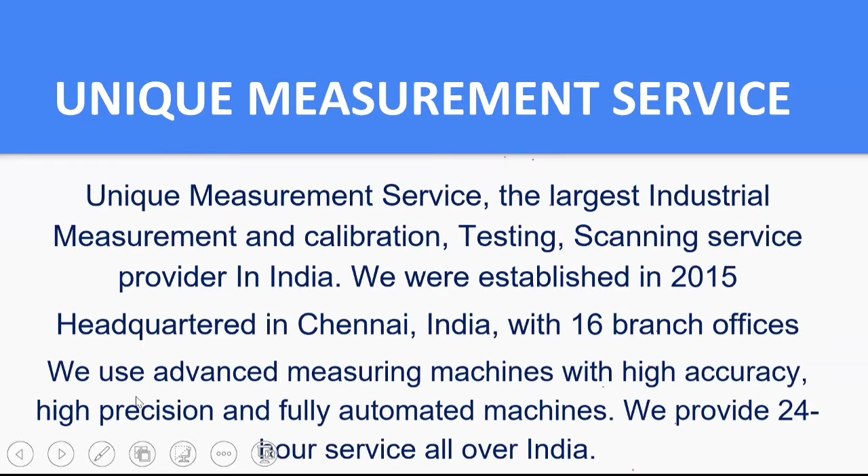Our major services are CMM inspection, portable CMM for on-site inspections, laser tracker inspection, calibration, and reverse engineering. We also provide metrology training courses.

Vision 2030: our vision and motto is to train 10,000 plus engineers and freshers with placement. As of now, we have been training nearly 25 to 40 freshers monthly across 2 batches. We have an exclusive training center at Bangalore, Peenya location. Our motto is to train the freshers, and we also provide paid advanced-level courses for quality control engineers.

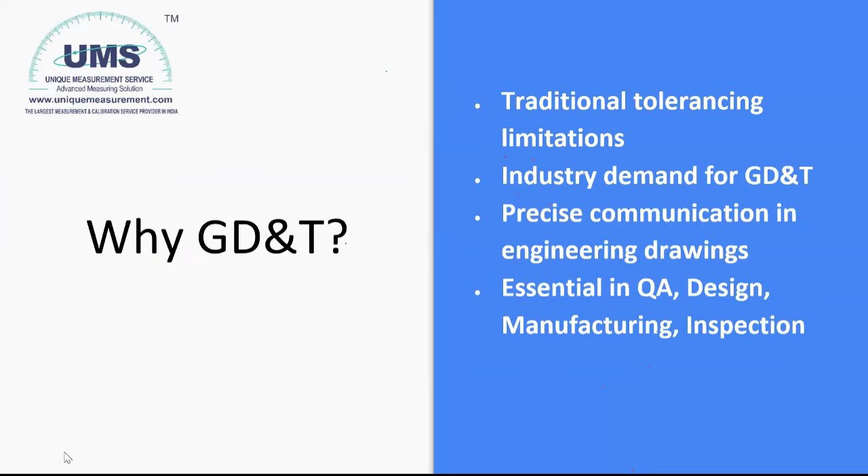This session will give you a strong foundation in GD&T: why it matters, how it is used in industry, and how it can help you stand out in your career. So get ready to decode the language of engineering drawings. Let's begin our session. I assure you it's going to be insightful, interactive, and definitely worth your time. Today you will be learning the basics of GD&T, the basic concepts, and how real world cases can be correlated with GD&T.

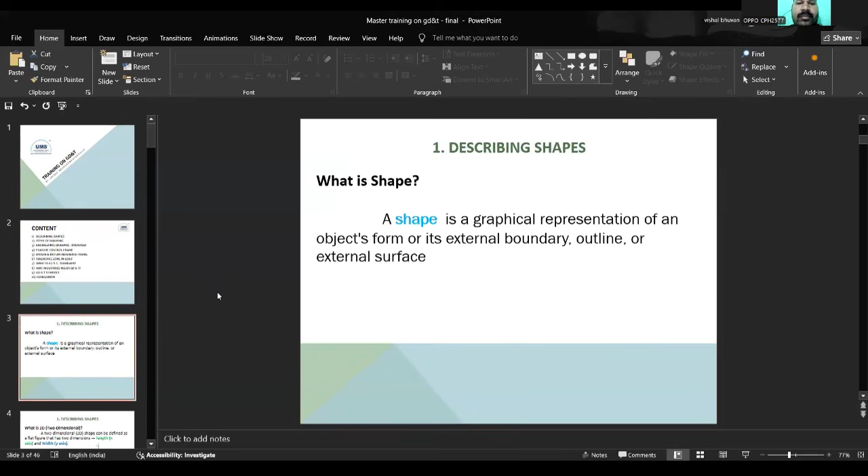So the first one is describing shapes. What is shape? It's very important because without understanding shapes, we cannot identify an object. A shape is a graphical representation of an object's form or its external boundary, outline, or external surface. So everything we see in the world around us has a shape.

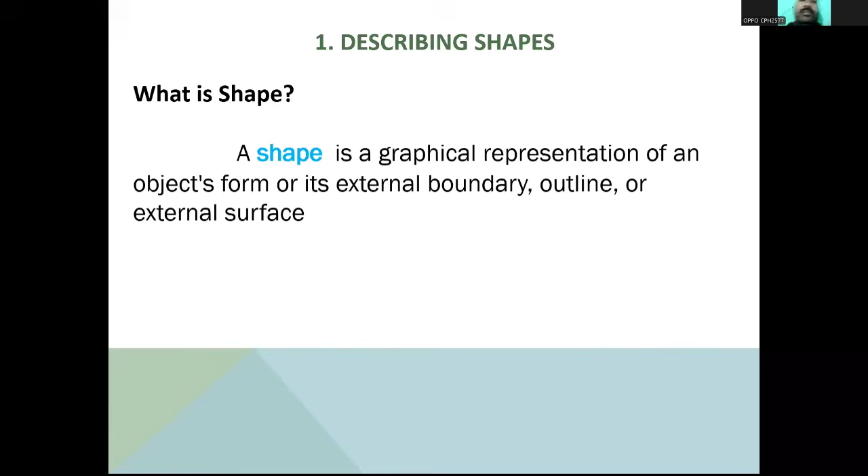We can find different basic shapes, such as two-dimensional and three-dimensional shapes. Now we will discuss two-dimensional and three-dimensional shapes. What is a two-dimensional shape? It has two measurable dimensions, which are length and width. We can call length as x and width as y.

Here is a 2D coordinate system. I will show how it works with a figure. This 2D coordinate system works with two coordinates for each point, like x and y, using these two coordinates to define any point or object. If I draw on a 2D coordinate system, here it is x and this is x minus, and this is y and this is y minus. So you can find the x-axis and y-axis functioning here. It doesn't have any depth or height.

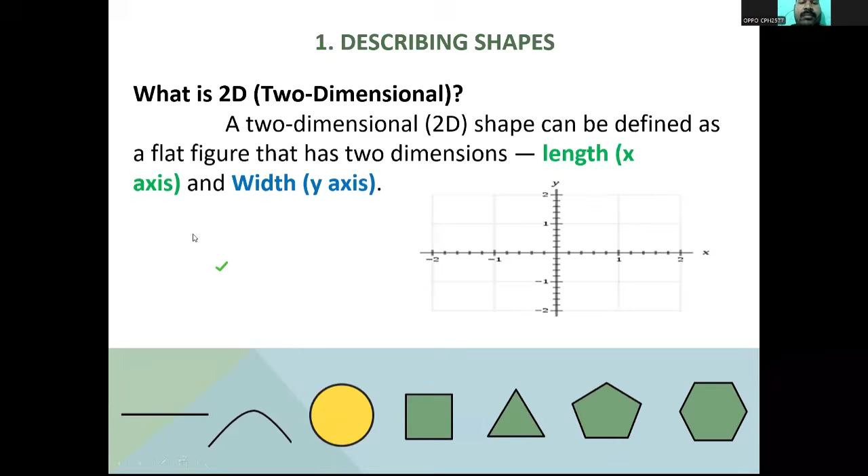So if someone will ask what is the difference between 2D and 3D, you can tell 2D is a two-axis measurable dimension and 3D is a three-axis, which means X, Y, Z. Three-axis will perform.

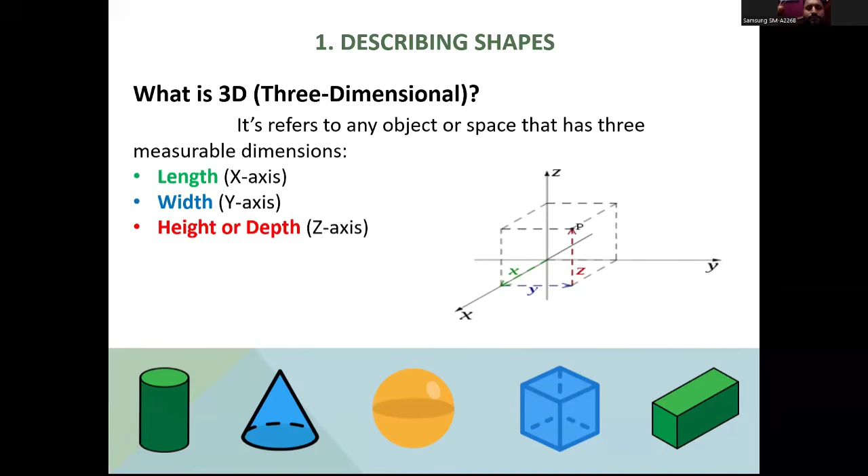So next one is type of drawing. There are two types of drawing: one is artistic drawing and the other is technical or engineering drawing.

Coming to artistic drawing, it is the art of creating an image by making marks on a surface. Using a pen, pencil, and ink, you can draw visuals of everything you have seen. You cannot get any technical information from this drawing, like dimensions or material properties. It is one type of thought expression. This drawing's purpose is to express creativity and convey emotions or represent scenes or objects visually.

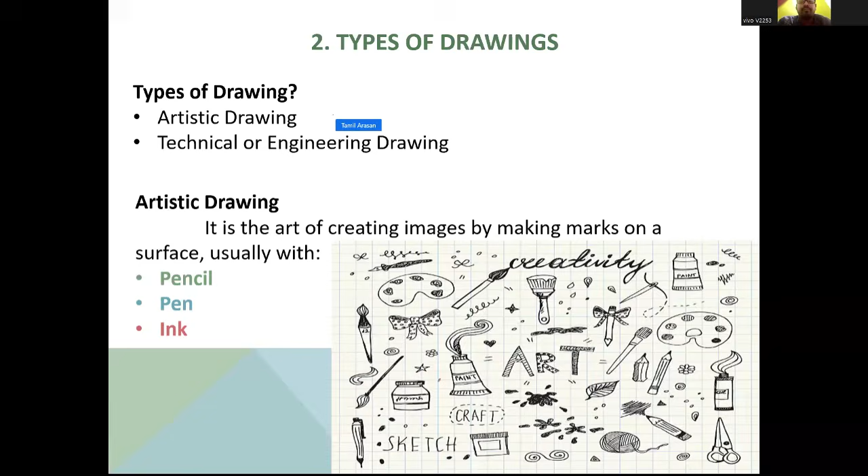So next one is technical drawing. Or engineering drawing will represent an object, used to communicate design intent clearly and precisely. It follows some standards, rules, and symbols to convey the size, shape, material, tolerance, and manufacturing intent for engineering components.

This type of drawing helps to produce a component because it provides all technical data like dimension, material requirements, and units. So this drawing's purpose is to communicate how a part should be manufactured or assembled.

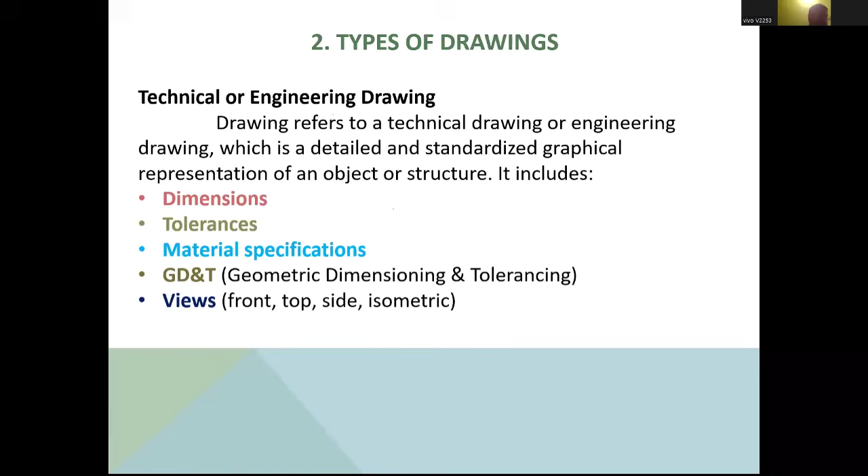So here I attached one sample engineering drawing for you. In an engineering drawing, it consists of more details like frame, title block, revision block, bill of material, lines and views, some cut section views, and tolerance tables, etc.

So let's start from the frame. You can see here, right? In the edge we have some scale, that is called frame. Generally, the frame provides a visual boundary and makes it easy to identify the dimensions and content. By using this frame, we can find specified dimensions or features on the drawing.

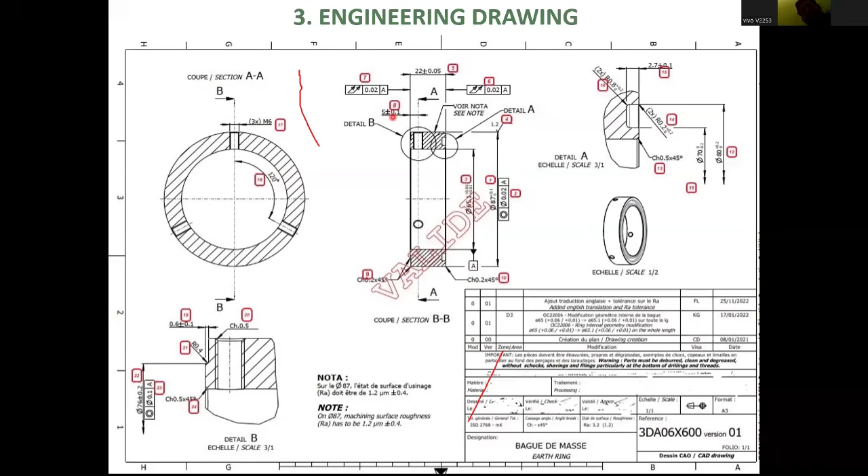I will give one small example. I inspect one customer part using a measuring equipment. I can check all dimensions except one, which is 5 mm length. Due to it being unreachable, we can't measure this. So we just imagine like this. I would like to communicate this matter to my customer. So I call my customer and tell him that the 5 mm distance was not possible to inspect.

Then he opened the drawing and noticed some of the dimensions are the same, like 5 mm. So you will consider this dimension and this one is 5 mm. You just imagine this. At that time he got confused. Then he asked, where is the exact location of the particular dimension?

So at the time I explained this 5 mm is fitted on E4, which means you can see here, this 5 will intersect with E location and 4. You can see if it is in here, if it is in this 70s, then I can call this one seated in A and 3. For that we are using this frame, and then its title block.

Usually a title block is located at the bottom right corner, so here you can find it. It has essential information about the drawing. It helps to identify company name, part name, material, what type of material they used, and the units, and who drew this drawing, and who approved this, and what type of projection is there, and scale details, which scale they are using for this drawing. So some essential information you will get from this title block.

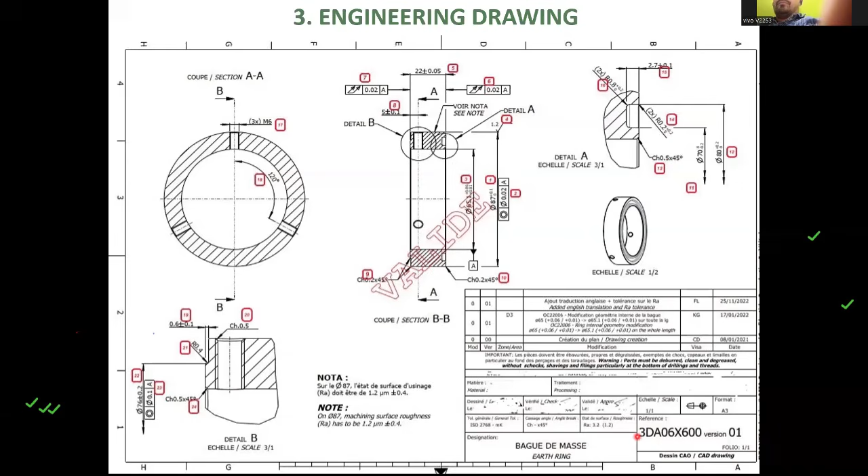Next one is a revision block. The revision block helps to track changes made to a drawing, ensuring a clear history of modification and approval. I will show how it comes. In some drawings you can identify this one is the revision block. So first one is revision; some industries will mention 1, 2, 3 like that.

But some industries use A, B, C like that, they will mention. So here is revision A, and here some description is given. They updated chamfer details on the 9th of February 2022. So who made this update? They just mention it here in short form, and they also mention which zone they updated.

So the second one is a diameter change. The 12 mm diameter was changed to 10 mm diameter on the 9th of March 2022, and here they also mention some zones. So for that purpose, we can identify a revision block in drawings.

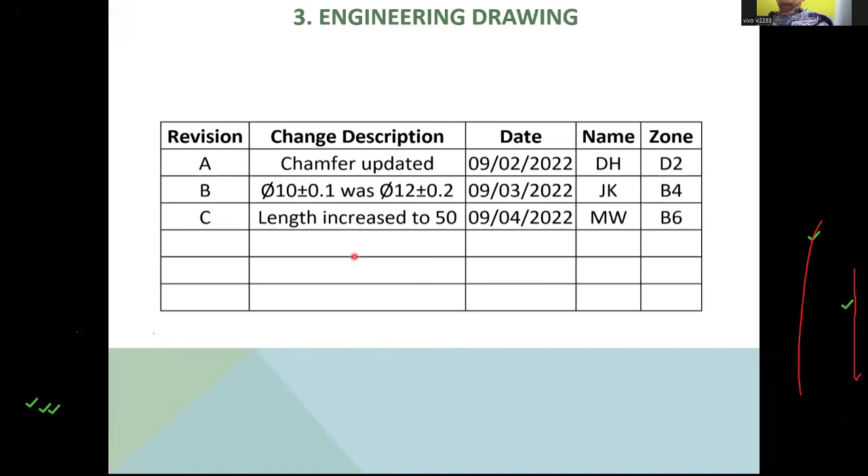So next one is bill of material. Frequently we can see this type of table in assembly drawings. While assembling gauges or fixtures, it will be helpful to organize child components and where they are assembled.

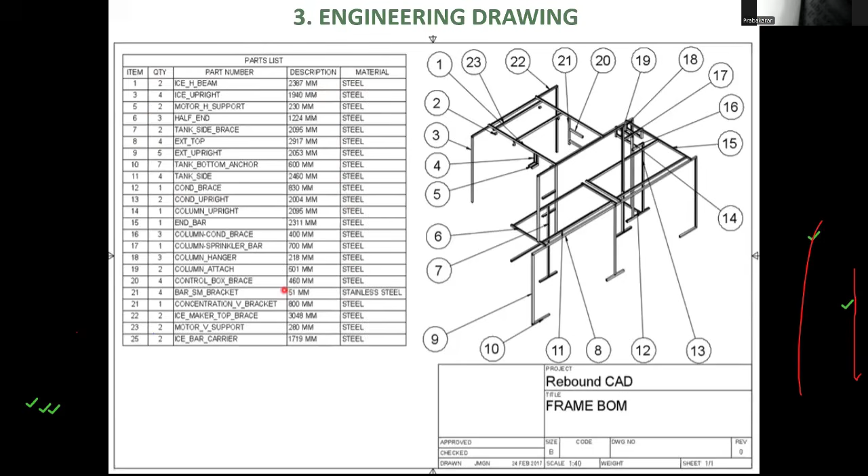So here you can see one table I attached, and in this table you can identify the child part details like the part number, how many quantities are required for assembly, the overall size of that particular component, and which material. So every detail will come. So it will be very helpful to organize child components, and we can assemble easily.

So next one is lines. We are using so many different lines here. So the first one is construction line. This line we use for multiple views of the same item. At that time we are not getting any final drawings; in pre-final drawings we can see all this. So we can use construction lines to prepare multiple views.

And second one is center line. Center line is used to indicate a feature's center axis. And then hidden line. It gives internal feature information of parts. If any internal feature is there, they will draw hidden lines like this. And next one is phantom lines. These phantom lines are commonly used to show movement of a component. It shows original position to alternate position. If any movable area comes, then they will mention these phantom lines.

And then next one is drawing lines. It represents the visible edge and outline of an object as seen from a particular viewpoint. And next one is break line. Break line is used when some feature cannot be drawn fully. It is for long and straight features. So we can use it in very lengthy drawings.

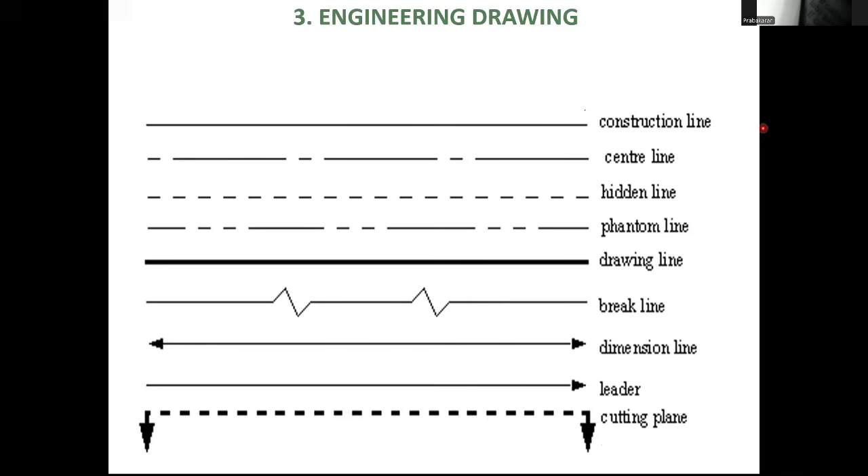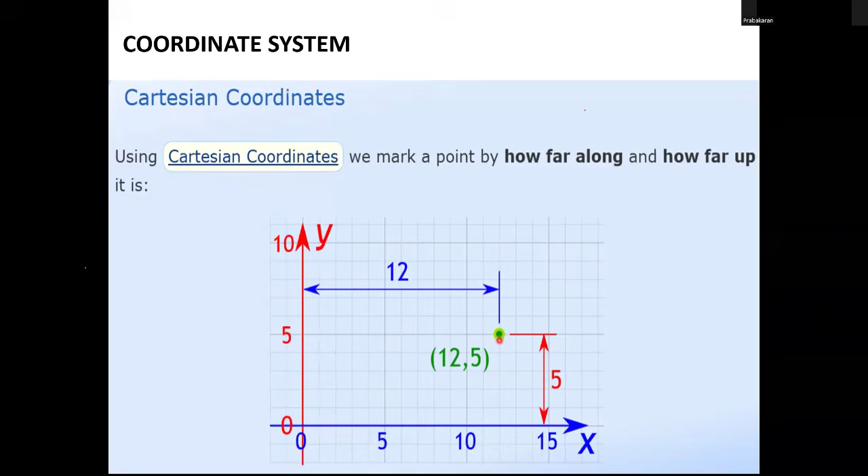So next one is coordinate system. There are two types of coordinate system. First one is Cartesian coordinate system, and next one is polar coordinate system. So coming to Cartesian coordinate system. Cartesian coordinates use linear distance. Here we only consider horizontal and vertical distance. I have a point here, so I need to find its distance from my origin. If we consider this as origin, in x-axis it is 12 mm distance, and in y-axis it is 5 mm. So only linear distance we use in this Cartesian system.

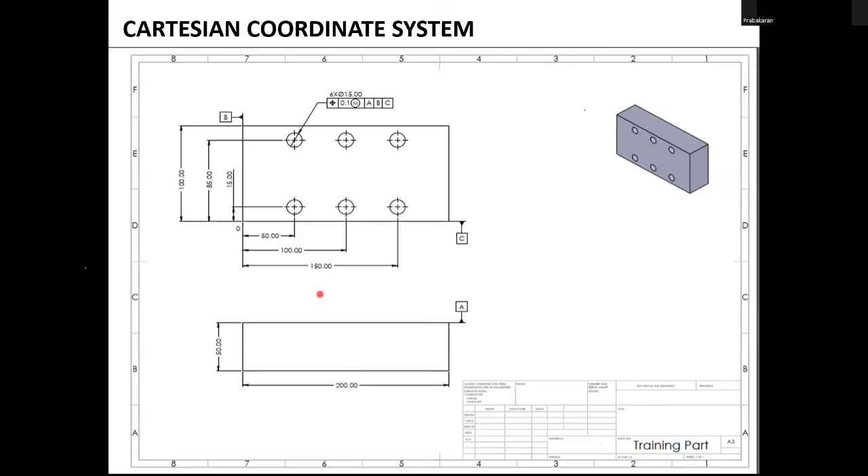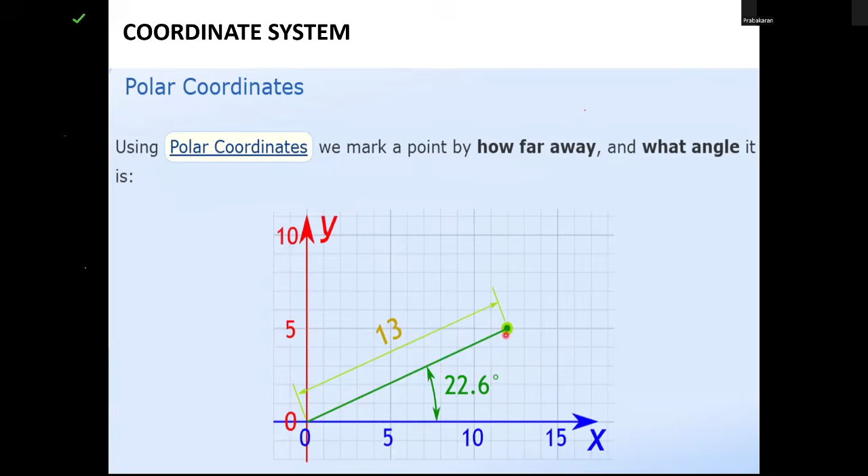So coming to polar coordinates. I already know about that point. We have it in Cartesian distance, but without Cartesian distance, we have to find this point. So by using angle and radial distance, we can identify these points without the Cartesian coordinate system. So I will show a drawing of how it works. So here it is.

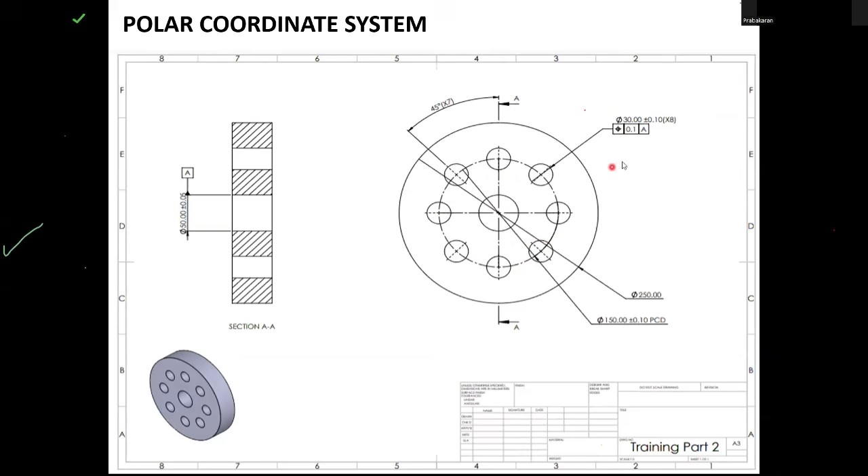So next one is feature control frame. A feature control frame is a rectangular box used in GD&T to define tolerance and how they apply to a feature of a part. This feature control frame is divided into compartments or blocks from left to right. So the first compartment will be a geometrical tolerance symbol. So we are mentioning the geometrical tolerance symbol.

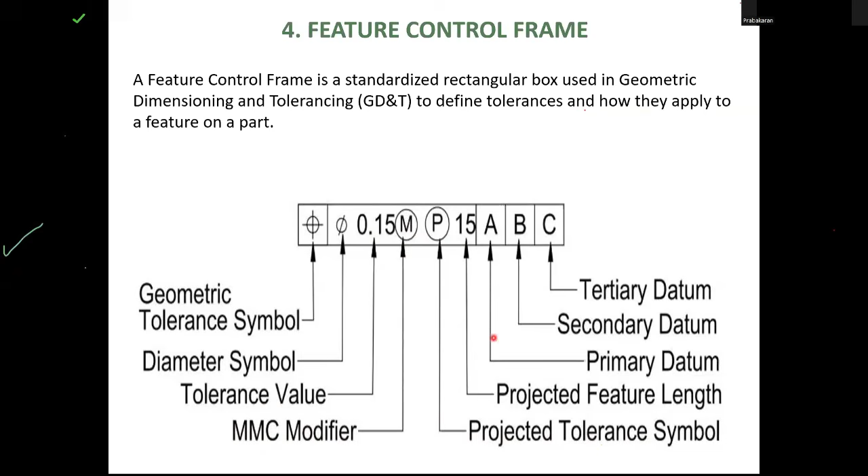Projected tolerance is a modifier used in GD&T to control the variation of a feature that will be assembled with another component, especially when the feature extends out from the part, like pins, studs, or threaded holes. It ensures the actual assembled position stays within the acceptable limits. The purpose of projected tolerance is to control the orientation and location, not just at the feature base. Through the height we can control this position.

And next, here they mentioned the primary datum, secondary datum and tertiary datum. The feature control frame's purpose is to communicate how much deviation is allowed and show which datums are used to inspect the features.

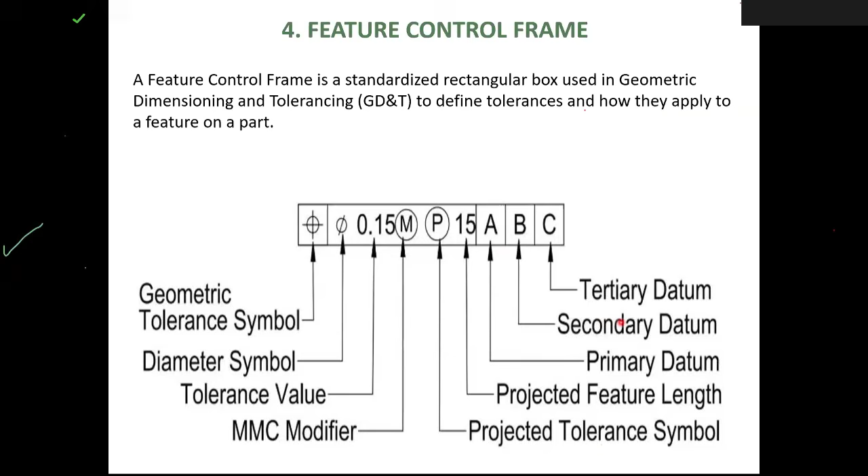Next, what is a datum reference frame? A datum reference frame provides a fixed location for the part or its features, allowing for accurate measurement and tolerance. It is a coordinate system composed of three or more datums, usually primary, secondary, and tertiary. It ensures parts fit together correctly in assembly.

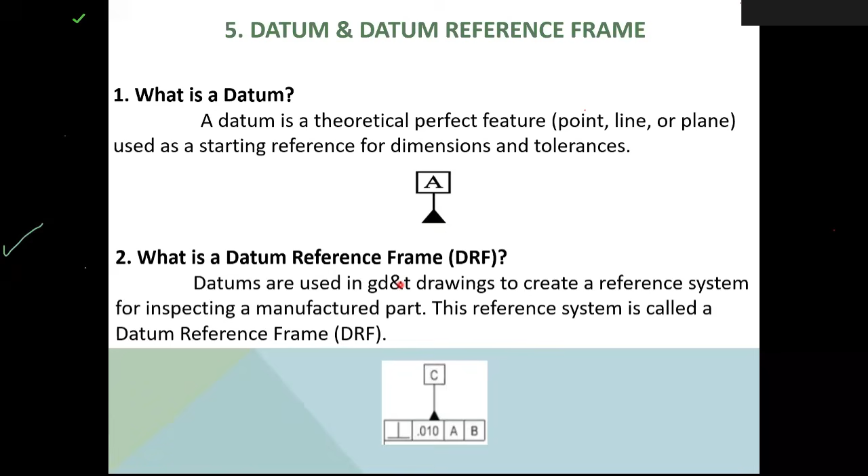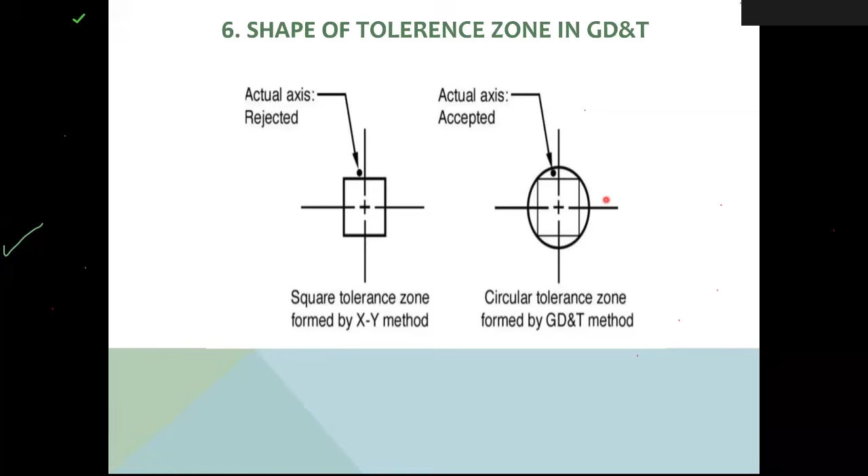In the same case, I applied this circular tolerance zone. Once I applied the circular tolerance zone, my part was okay, because it covers 57% more area. Compared to the square tolerance zone, the circular tolerance zone gets 57% on the higher side. So in the same case, when I used the circular tolerance zone, my part was okay.

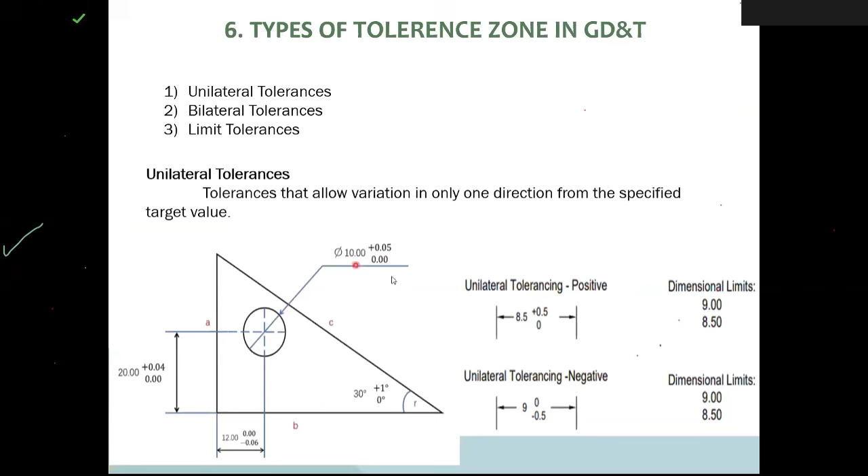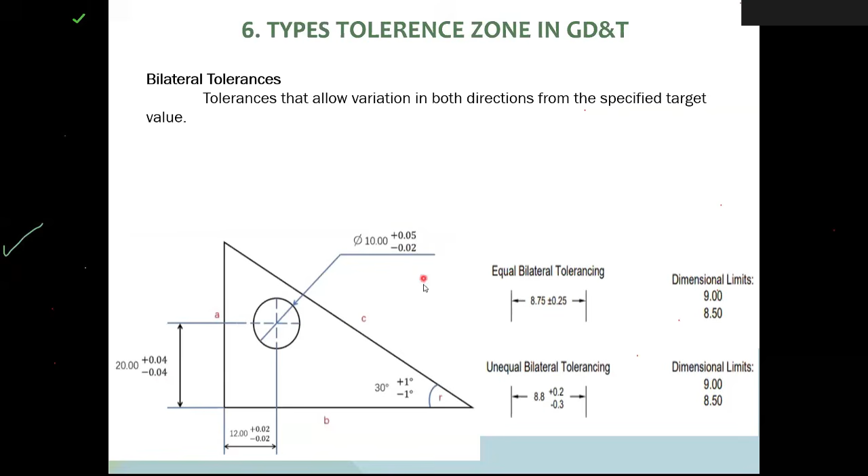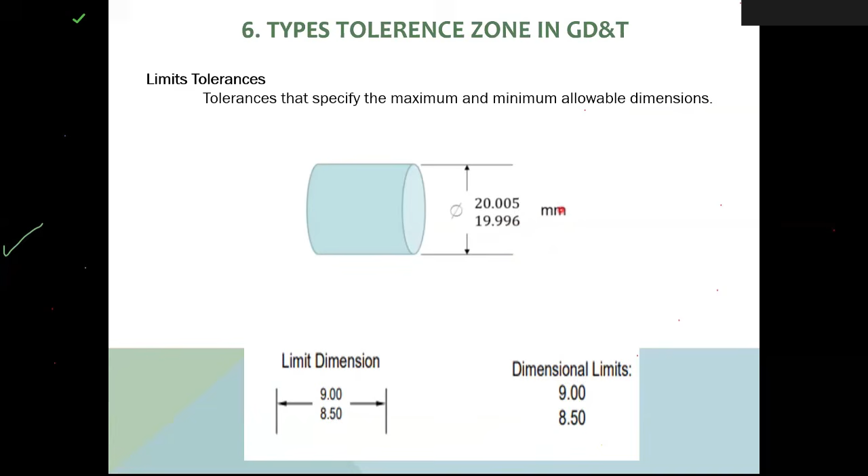So in tolerance zone, in GD&T, we are using different kinds of tolerance zone. For line, it will create parallel lines tolerance zone, and in some cases it will create parallel planes when we are going to measure some planes. At the time, the tolerance zone becomes parallel planes. And if we are going to take some cylinder, then cylindrical zone will apply here.

So here I will hand over my session to Mr. Joshua. Myself Joshua, I've been working here for the past 5 years as a trainer. Okay, finally we came to the GD&T topic. I hope everyone understood the previous topics. With those topics, we can easily know about GD&T. If you have any doubt or questions, you can put them in the comment box or message box. Finally, we can discuss about that.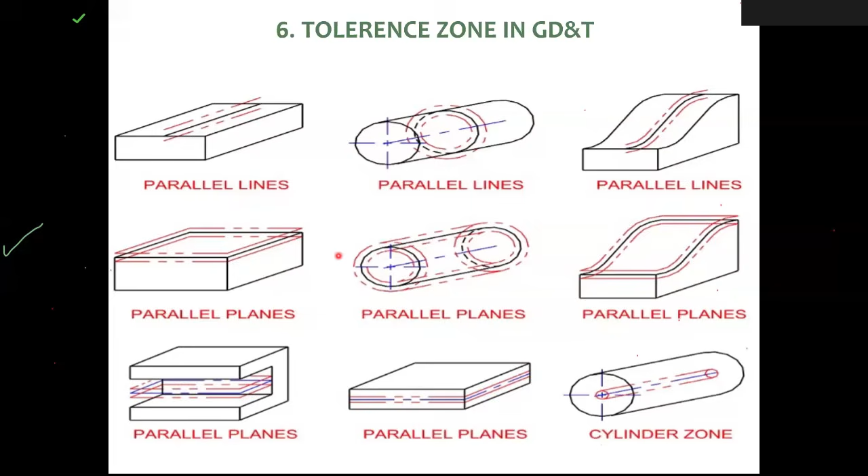Okay, first GD&T. GD&T was invented and developed by Stanley Parker in 1938. He is also known as the father of GD&T. The full form of GD&T is geometric dimensioning and tolerancing. It is a universal symbolic language to communicate with manufacturers and quality inspectors. It gives clear communication of limits and tolerance. It helps us to control and communicate variations, and it will ensure 100% function and fit.

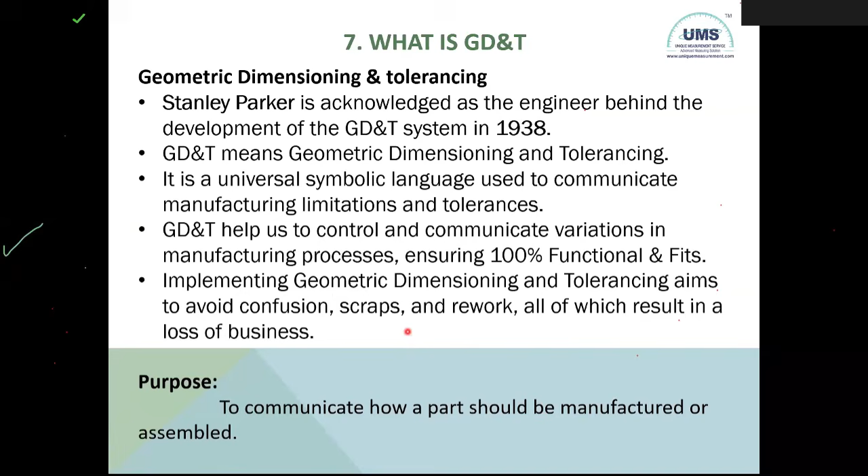So implementing GD&T, we can avoid confusions, scraps, and reworks, which result in a loss of business. So the main purpose is to clearly communicate the intent of the design to the manufacturer.

So GD&T standards. ASME Y14.5 is the GD&T standard. ASME means American Society of Mechanical Engineers, a non-profit organization. They developed and standardized GD&T. And here 14: in GD&T, we have 14 symbols, for mentioning that they have given 14. And .5: in GD&T, we have 5 tolerance classes, for mentioning those tolerance classes .5 has been given. So the GD&T standard is ASME Y14.5.

So here, what is the use of GD&T? With two examples, I will show why GD&T is useful, and without GD&T, what drawbacks they faced before. Okay, here two drawings are there. On the left side, no GD&T is mentioned, so they are manufacturing the part with only the dimensional tolerance. On the right side, they are making the part with GD&T.

So on the left side, they are maintaining the distance 25, but they are not controlling the feature, because before GD&T there was no clear communication about the feature. They control the dimension, but in assembly there will be an air gap due to the form error. Due to the form error, the part will not fit nicely, and due to the air gap, leakages will be there. So in the traditional method, only dimension is controlled.

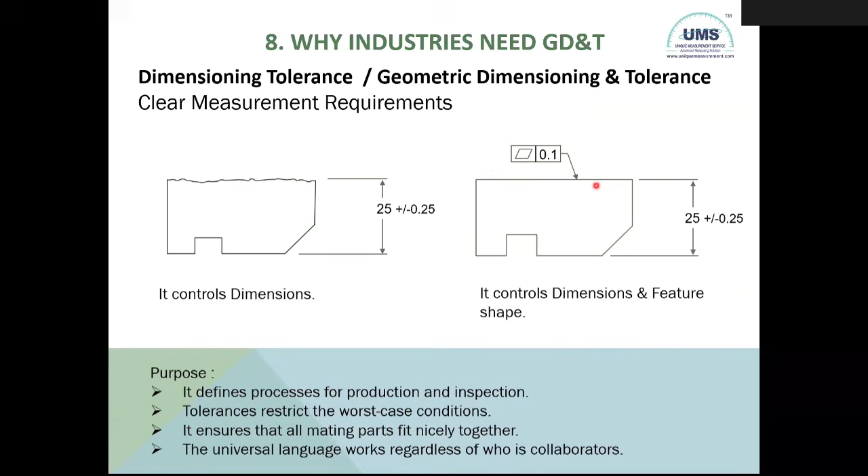In GD&T, there is a clear communication about flatness of the plane. So the feature form is well controlled. During assembly, it will assemble nicely and smoothly. So with GD&T, we can control dimension as well as the feature. That is the plus point.

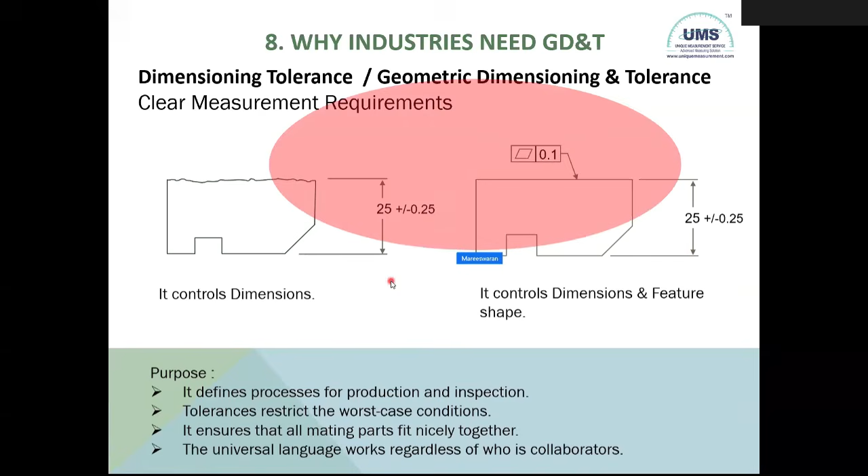So next, in this scenario, how GD&T will help in assembly, function and fit. On the left side, they are using normal traditional dimensioning without GD&T, and on the right side, they are using GD&T position.

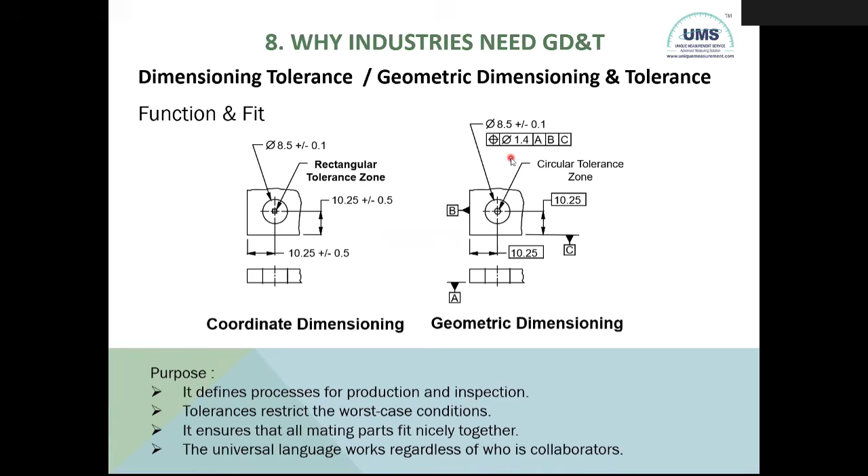So here, on the left side, in the traditional dimensioning method, the tolerance zone will be a rectangular tolerance zone, and with GD&T, the zone will be circular. So here below, the circular tolerance zone is 57% larger than the rectangular tolerance zone. So the manufacturer can get a wide tolerance zone, so part rejection will be reduced.

For example, here the exact theoretical position is in the center, but the actual part is located here. So in the traditional method, the part will be rejected and rework will be done, and due to the rework, production will be stopped. In GD&T, the part is outside the rectangular zone, but it is inside the tolerance, so the part is not rejected. If the actual value gets outside the circular tolerance zone, then rework will be done.

So here, comparatively, we can get a wide tolerance, so there is no rework. Part rejection will be less, and it is easier to manufacture the part. So the main purpose is, it defines the process of production and inspection. Tolerance restricts the worst case condition. It ensures all mating parts fit nicely together, and it is a universal language with which we can collaborate easily with various countries.

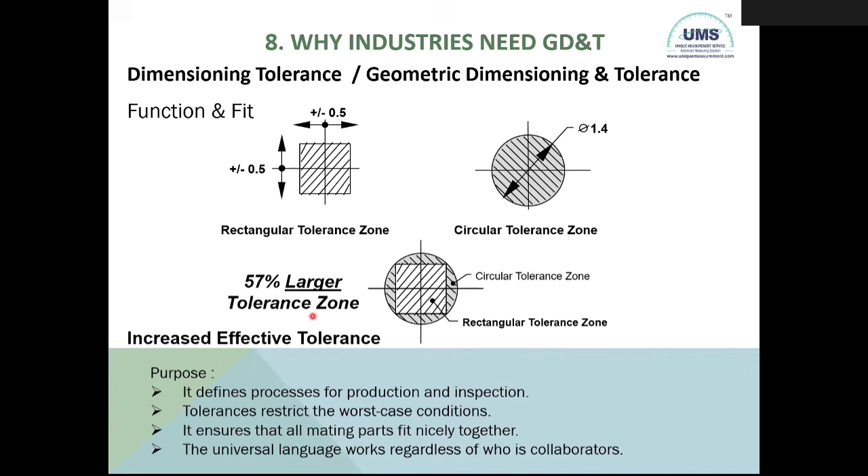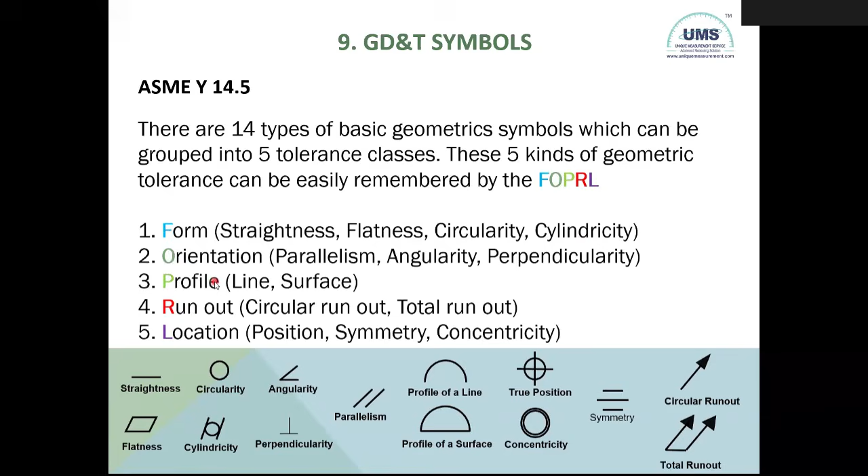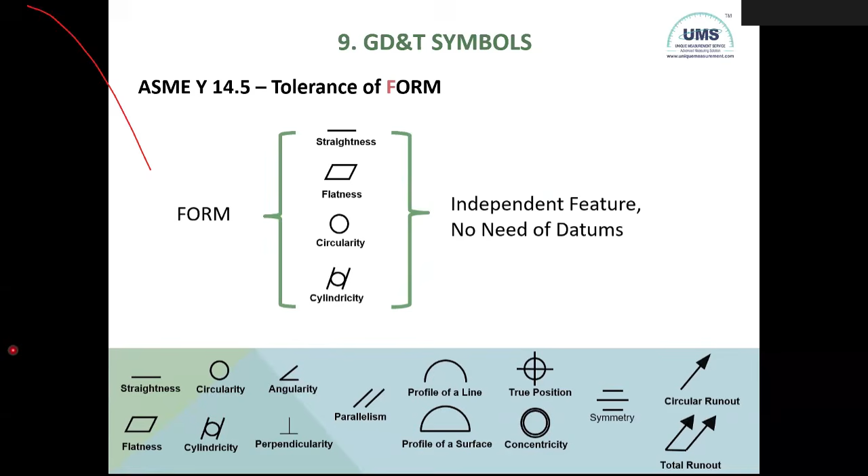So next, we're going to GD&T symbols. We have 5 classes: form, orientation, profile, runout, and location. We can easily remember the shortcut FOPRL. In form, straightness, flatness, circularity, and cylindricity will come. You can see here in this slide. Tolerance of form is an independent feature because there is no need of datums, so it is called an independent feature.

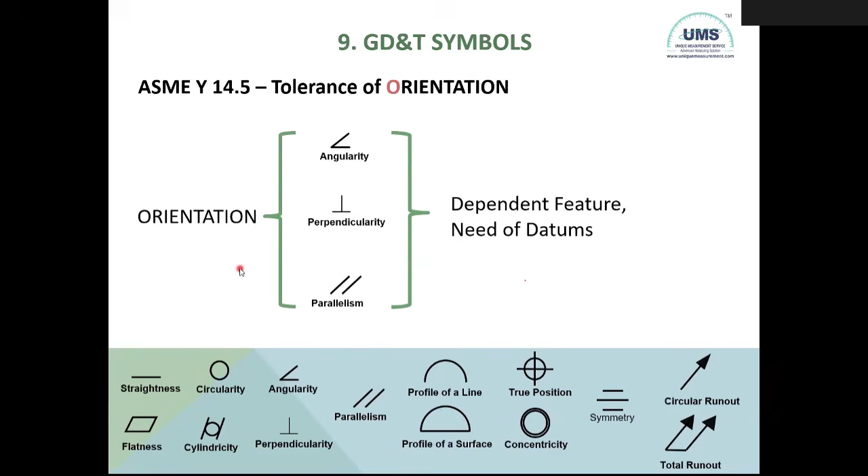Next, orientation: angularity, perpendicularity, parallelism. For this tolerance, we need datums, so these are dependent features. Next, profile: profile of line and profile of surface. In this tolerance, we may or may not need datums. It depends upon the process, so it may or may not be a dependent feature.

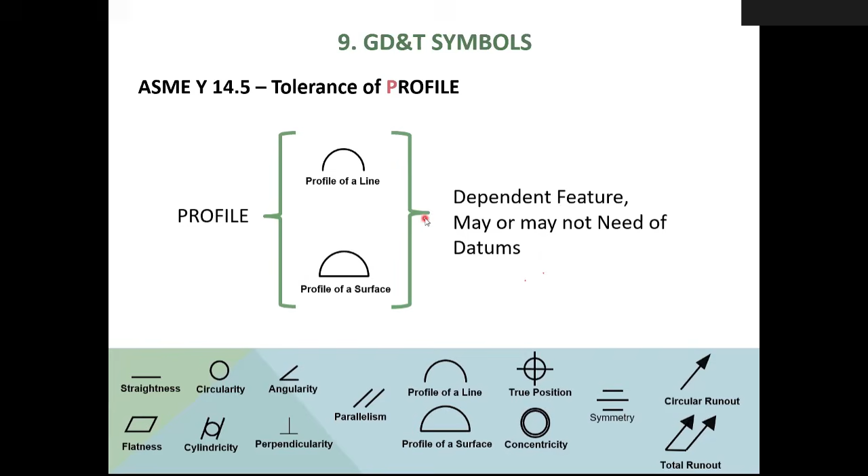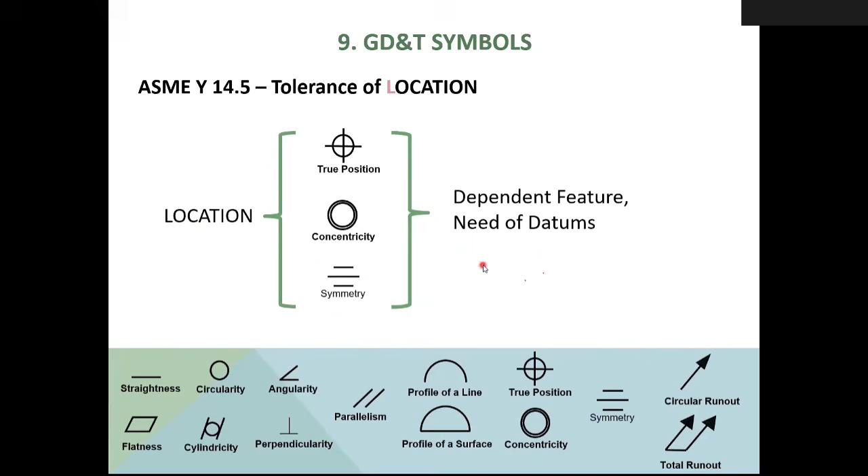This is location. In location, true position, concentricity, and symmetry will come. Without datums, we can't know where the location is, so it is a dependent feature. Next, runout: circular runout and total runout. We need a datum, so it is a dependent feature.

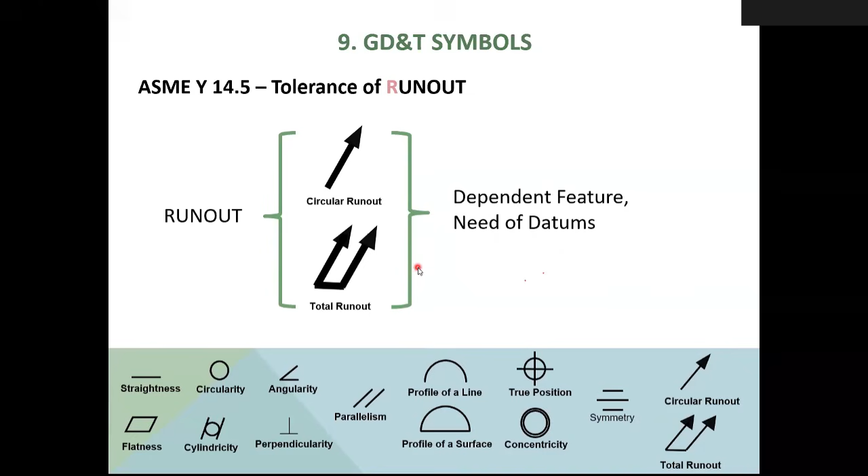So now we're going into the topic tolerance of form, straightness. This is the scenario of the part. In the right side view, you can see it in isometric view. On one linear axis, they have given 0.5 tolerance, and on another linear axis they have given 0.1 tolerance. This is the symbol of straightness.

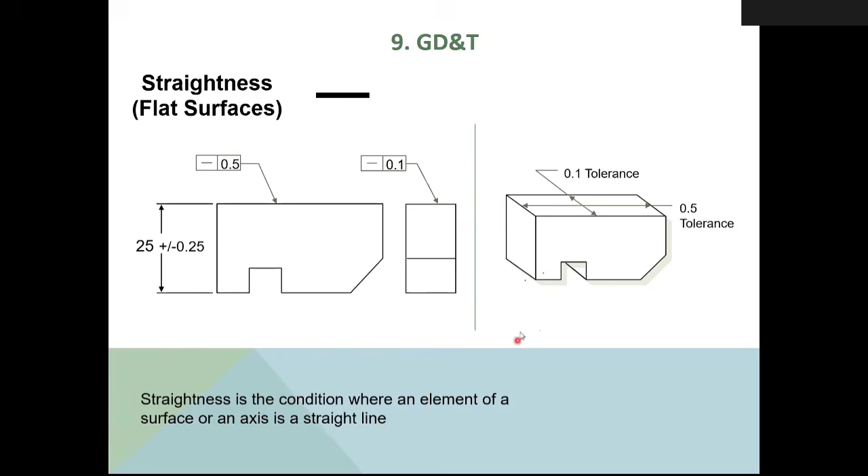Here the definition is: straightness is the condition where an element of a surface or an axis is a straight line. We're going to control the deviation from the straight line. In the next slide, you can see it clearly. The tolerance zone is bounded by 2 parallel lines. You can see the waviness. This is the deviation from the straight line.

If the waviness goes outside the 2 parallel lines, then it is out of spec, so the part will be rejected. And if it lies within the 2 parallel lines, then the part is okay. So how will we calculate the value? Here you can see the maximum point is 25.25 and the minimum point is 24.75. We calculate maximum minus minimum. If the value is less than the tolerance zone of 0.5, then it is located within the 2 parallel lines. If the value goes above 0.5, then it goes beyond the 2 parallel lines.

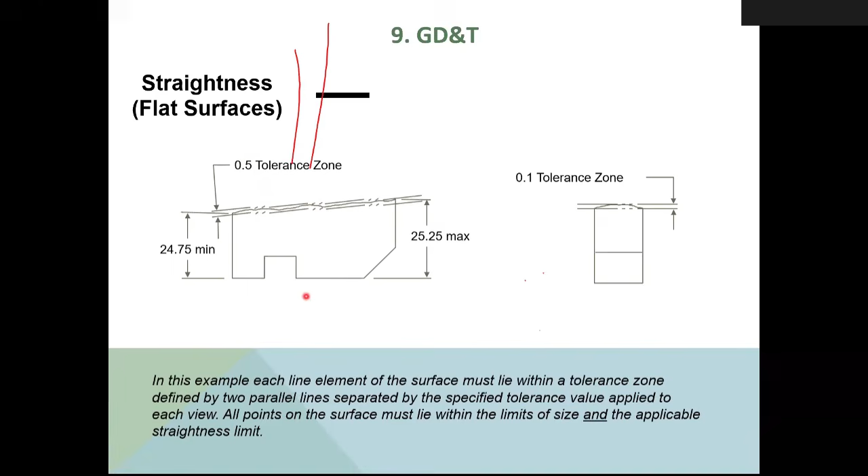So here you get only the one linear axis waviness. Now we can go to another scenario, a cylindrical job. In this cylindrical job, on one linear axis, we're going to check straightness. Here you can see the drawing. It is given that on this line we're going to check straightness. Here you can see the tolerance zone. The waviness of the cylindrical job must lie within the tolerance zone. So wherever we can make a line, we can check and control straightness.

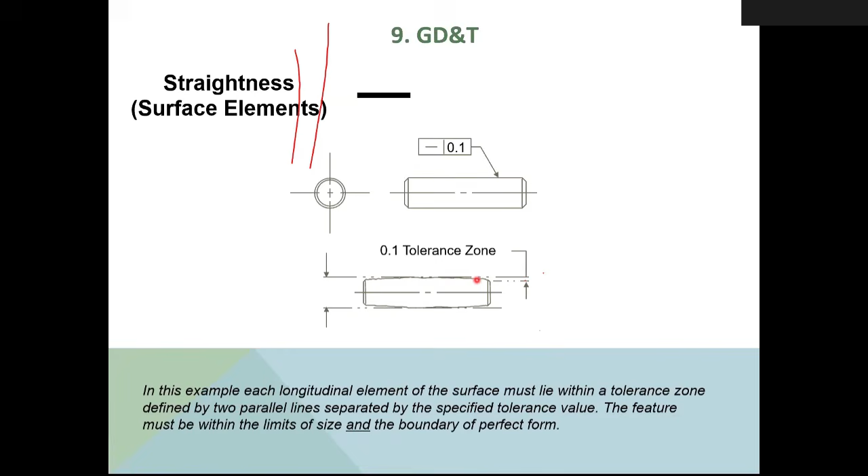So, the manual method of checking straightness. Here we can keep a dial gauge on the part and set it to 0. So here a dial gauge has been set at 0, and then translation must be done as a linear axis movement. You can see it in this arrow mark. So the dial will move in a linear translation.

So we can get this variation, and the value will be noted. If the value goes above 0.1, then the part is deviated. If the value lies below this tolerance zone, then the part is okay.

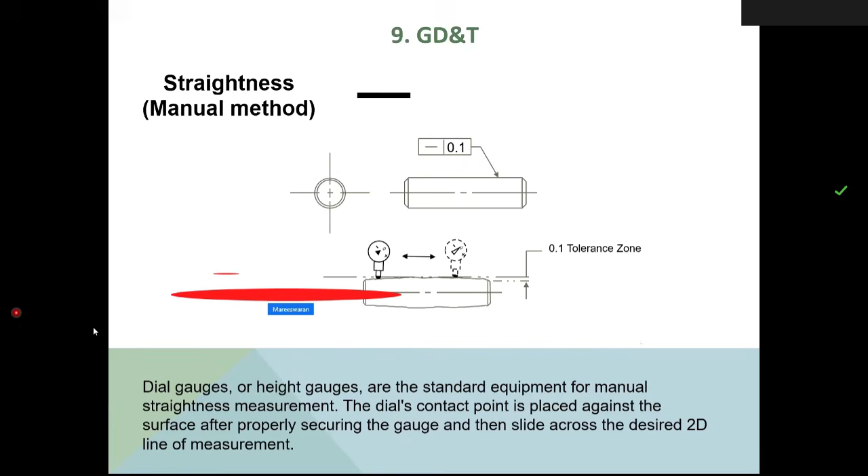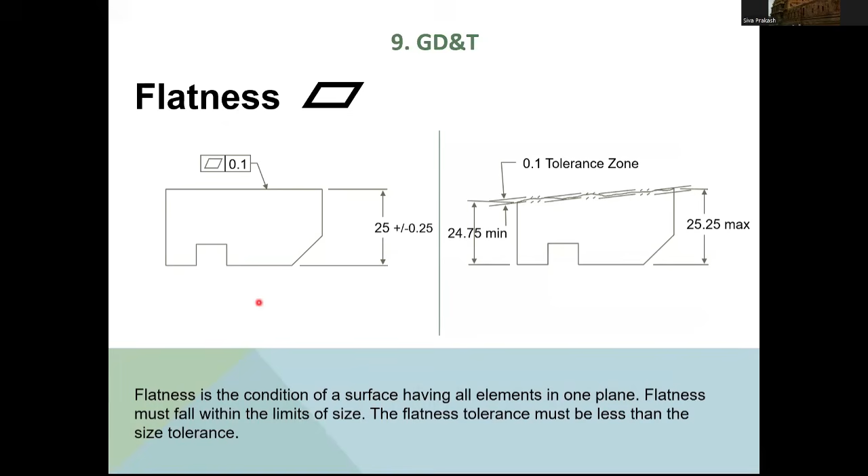Okay, next, flatness. So flatness is the same as straightness, but we're going to check in two linear axes. Here, this is the side view. In the next slide, there is a 3D view. Here, the tolerance zone has been separated by two parallel planes. In straightness, the tolerance zone is separated by two parallel lines. Here in flatness, the tolerance zone is separated by two parallel planes.

So the zone is shown here, and the waviness of the part must lie within the two parallel planes. So here also the same calculation will be done. Maximum deviation minus minimum deviation gives us the value. So the value must be below this tolerance zone. If it is below this tolerance zone, the part is okay. And if it goes above 0.1, then it went outside the two parallel planes.

So this is the manual method of checking flatness. Here we will move the part or dial gauge in both linear axes. So we can get two linear waviness. In straightness, we get only one linear waviness. So this is the difference between flatness and straightness.

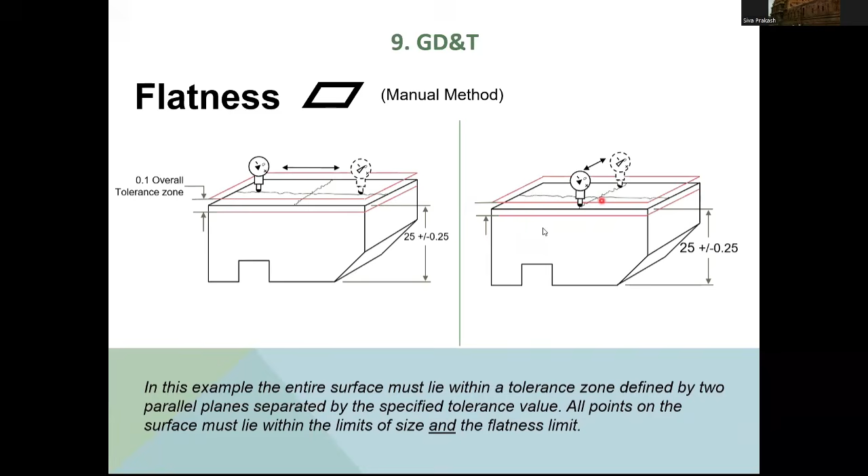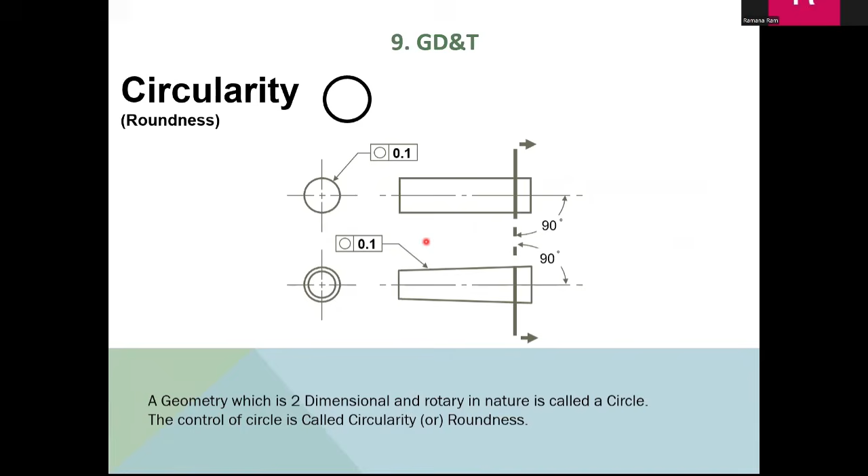Here you can see at the right side the actual part deviation. Here the tolerance acts like two concentric circles. The waviness of the circle must lie within these two concentric circles. Here the overall tolerance zone is 0.1, so you can see clearly. So the manual method is the same as straightness, but here rotation will be done instead of translation movement. The part is rotated 360 degrees, and then the waviness of the circle is measured.

The same dial gauge is set to 0, and the part is rotated around the central axis, and the dial gauge records the variation of the surface. The dial gauge must have a total variation less than the tolerance zone. If the reading goes more than 0.1, then the part is deviated. It went out of the two concentric circle zone.

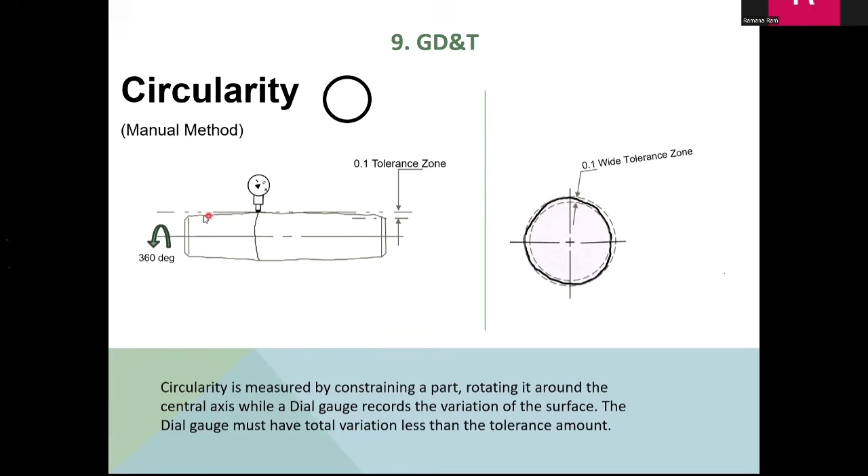So what will be affected by circularity and cylindricity error? If they do not maintain this form in assembly, an air gap will be there and the fit is not perfect. So if any fluid passes through the pipe, leakages will happen easily. So to restrict that, circularity and cylindricity play the major role.